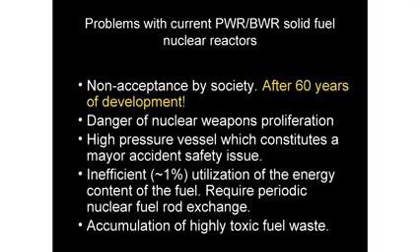So can you imagine worldwide 1,000 nuclear reactors producing each 230 kilograms of plutonium? It becomes a proliferation nightmare. It's a problem. And it worries people.

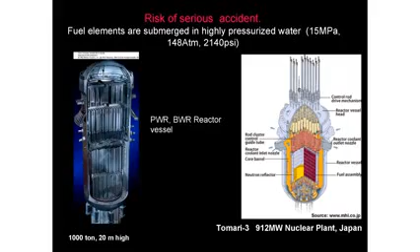Another problem is that present reactors have the nuclear fuel inside the reactor core, which is like a compressed container at very high pressure. And any problem with it is really a deep problem. We saw what happened in Fukushima. Fortunately, none of them actually exploded. None of them actually melted completely. Just a little melting, and it produced enough hydrogen to have the explosions we all saw. So this is a serious accident risk.

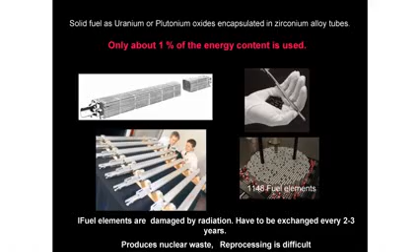Then with current technology, we only use about 1% of the energy contained in the fuel. The fuel is damaged by the use, by the radiation, and it is exchanged. And it produces nuclear waste. And these elements have to be constructed with extreme care, so it is expensive. And they turn into nuclear waste in 2 or 3 years. And this nuclear waste, if it is not reprocessed, is a problem which we all know: highly radioactive material with thousands of years of half-life.

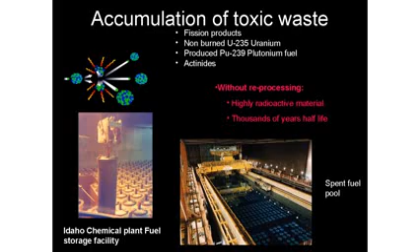So now we go to the thorium molten salt reactor, which I call the true green energy system. What do we want for the world? I think diversity, and nuclear can help to balance, as we just saw in the previous talk. A clean technology, free of CO2, a solution to nuclear waste. We want a safe technology so that we can see the future with optimism, not worry. We want to use our own resources.

At least we in the third world countries want to control our future and not be subject to policies like the US Global Nuclear Energy Partnership, which puts us as users with no control on our systems. And we want to use our own resources so that we develop ourselves, not rely on the development of other countries. And we want to use non-proliferative technology.

So, what is the molten salt reactor? I'm going to talk about that after I have a drink of water.

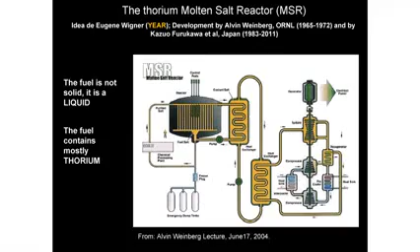It is an idea that occurred to Eugene Wigner and was developed by Alvin Weinberg. Alvin Weinberg, by the way, also developed the current technology we have. The fuel is not solid, it is a liquid. There are no fuel rods. In the thorium molten salt reactor the fuel contains mostly thorium, very little uranium. It circulates inside the reactor, and it goes out of the reactor to transport the heat to another cycle, which then transports the heat to the power-producing part. So, why use thorium?

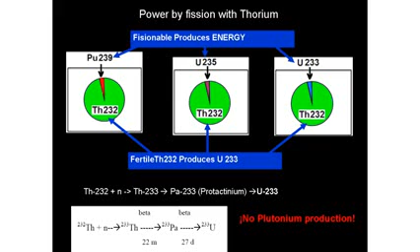Thorium can be used with either plutonium-239, uranium-235, or uranium-233, which is produced by the part of thorium which is inside of a reactor. So this thorium is now substituting for the uranium we had before. And it is fertile. It produces uranium-233, with which you can produce more energy, but it produces no plutonium. Very little plutonium is produced in these reactors.

Thorium is 4 times more abundant in the Earth's crust than uranium. So our resources are, shall we say, 4 times 300 years. Immediately we have, without changing very much the mathematics, 1,000 years of use. It produces much less nuclear waste, a fraction of long-lived actinides. So by fission, you produce nuclear waste, but you also produce actinides, which are long-lived. And in the case of thorium, you produce very little long-lived nuclear waste.

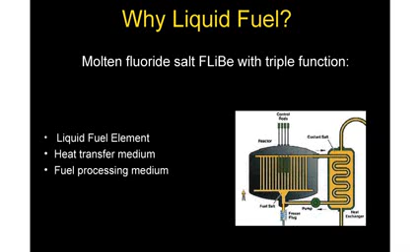Now, why liquid fueling? This is again a point. The molten fluoride has a triple function. It is the fuel element to consume and to produce the energy. It is the heat transfer medium, and it is also the fuel processing medium. So you don't have to change things. In the same cycle, you produce the fuel, you transport the heat, and you do the reprocessing of the fuel.

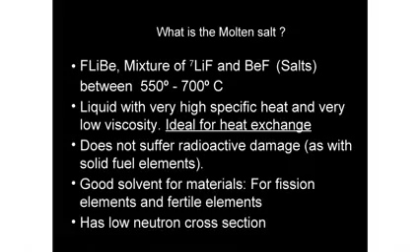And what is this molten salt? The molten salt is a mixture of fluorides, lithium fluoride and beryllium fluorides. These are salts which are like table salt. It is a solid at room temperature, which at high temperature becomes liquid, and it is clear like water. It is a liquid with very high specific heat and very low viscosity, which is ideal for heat exchange media.

It does not suffer any radioactive damage. It is a liquid, and with gamma radiation or alpha radiation or neutrons produced, it is not damaged at all. So it remains inside the reactor without being damaged, quite contrary to what happens to solid fuel elements. And it is a good solvent for fission elements and fertile material, and it has a nuclear property of very low neutron cross-section.

So what does it contain, this liquid? It contains the fuel, which can be uranium tetrafluoride, either uranium-235, as is used now, or what will be used in the future in these reactors, uranium-233, which is made in the reactor from the thorium. Or it can use plutonium. So the scheme is to burn all the plutonium in nuclear weapons now as fuel in these reactors, and to use the thorium inside to be converted to uranium-233, and therefore produce more fuel.

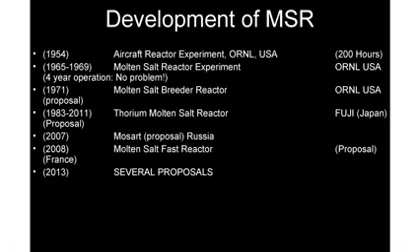So a short history, very quick, of the development of the molten salt reactors. The first idea was in 1954. The Americans had, due to the Cold War, the need to transport nuclear weapons from the US to Russia, very far away. So they asked the Oak Ridge National Laboratory if they could make a reactor that could fly. So it was made, the aircraft reactor experiment. This reactor was the first molten salt reactor, and it worked for 200 hours perfectly all right, and it was light enough to be put in an aircraft, and it gave them the idea to do a molten salt reactor for power production. And that was the 1965 to 69 molten salt reactor experiment, which had a 4-year operation.

And then after that, they created the proposal for the molten salt breeder reactor. And this molten salt breeder reactor was taken by the Japanese groups, who developed the Fuji reactor. And further proposals, as shown there, MOSART in Russia, the molten salt fast reactor proposal in France, and several current proposals, which I'll mention very briefly at the end.

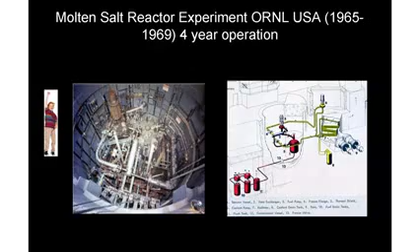So this is a photo of the molten salt reactor. It was a small thing. You can see this little boy here, which I put there. Standing in here, he would be more or less at the height of this, which was the pump. And this reactor did not produce electricity. All the power was just blown into the air.

You can see the diagram on the right side. The reactor was in the middle, and the reactor was stopped every weekend. They drained the liquid to those tanks in the bottom, and on Monday they put it back up and continued the experiment. Very, very different from current reactors, which can't be stopped.

So there are several kinds of proposals for molten salt reactors. The first classification is two-fluid reactors or single-fluid reactors.

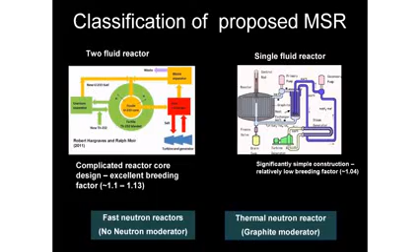The two-fluid reactors have a core where the center, here, the reaction takes place, the fission takes place, and the neutrons go out into a blanket which is around, which is there to produce more fuel. So it is a complicated reactor, the core design, but it has very excellent breeding capacity.

So it can produce more fuel than it is burning. On the other hand, the single fluid reactor is much simpler, and it has a low breeding factor. That means it burns more or less the same or more than what it's producing. And then there is another classification, the fast reactors and the thermal reactors. We will talk more about that.

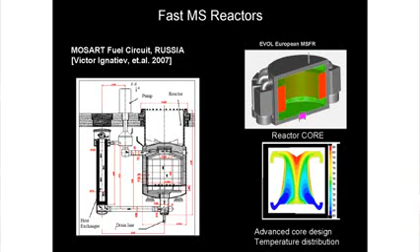These are two of the proposals for fast reactors. The MOSART, as described by Victor Ignatiev in 2007, designed in Russia at the Kurchatov Institute. And on the right side, the EVOL European molten salt fast reactor. It is a proposal that is being studied currently, and very recently, at the end of last year, a meeting of the EVOL showed this advanced core design, the temperature distribution, which is much better than this from the flow point of view.

Some of the advantages of fast reactors is that the core is extremely simple. It's just an empty tank. There's nothing that can go wrong there. It is extremely stable. And why is it so stable?

Well, because the fluid, if it becomes hotter, it expands. And when it expands, it reduces the reactivity. So therefore, by reducing the reactivity, it starts to cool. So it is naturally stable.

Some experiments, mathematical of course, that have been run, show that the reactor starts to heat up and then cools, oscillates, and it comes to a steady state. And this is what would happen if you suddenly stop all the devices inside the reactor, like, say, the case in Fukushima, no electricity. It is very stable. It is a breeder reactor that produces more fuel in operation.

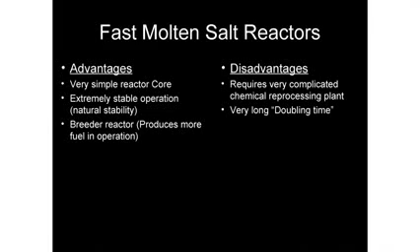But the disadvantage is that it has a very long doubling time. The doubling time is the amount of time that it needs a reactor to produce as much fuel as it has consumed. And for the EVOL project, as described in 2008, the doubling time is about 40 years, which is very much longer than the doubling time of the demand for energy. So something else has to be done in order to produce more fuel.

Now I'm going to talk about the thermal reactor, and mostly with the design of Kazuo Furukawa. He created the concept of the mini Fuji, then the concept of the Fuji reactor, and the concept of the accelerator molten salt breeder.

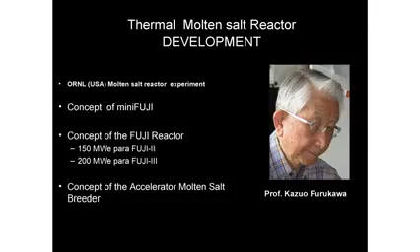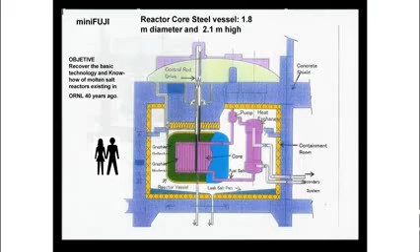First, the mini Fuji reactor. What is it? It's a very small reactor. The core would be about here, this size. Very small. And why? The objective is to recover the basic technology, the know-how that was obtained at Oak Ridge 40 years ago.

One thing is having the information there. Libraries are full of information, but knowledge really requires that you do things with this knowledge. And this is what is needed to make this little reactor, so that we actually know what we're doing and find out, again, all the difficulties.

In this reactor, the contents of the reactor core is mostly pure graphite with holes through it. 6% of the volume is the liquid that is flowing through. And there is control by graphite rods, which work the other way around. You increase the reactivity by introducing more graphite inside the core.

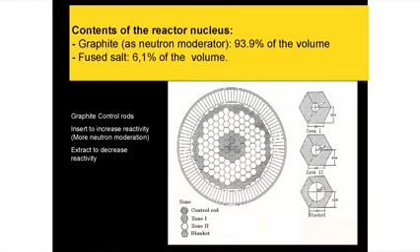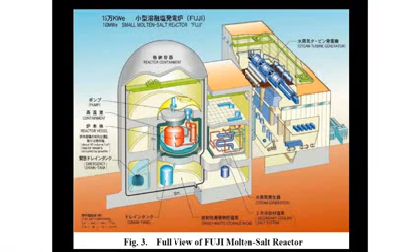On the right side are the parts of the reactor which transport energy and heat, and this produces electricity. And this is a description of the Fuji reactor core.

It is a small reactor, only 160 megawatt electric. And the idea is that it is so safe, it can be built right next to cities and have very little expenditure in transport of energy, electricity.

This shows the first containment area and the second containment area. Now, here, if anything would happen, you would drain into one of the containers below. And that is the heat transfer unit.

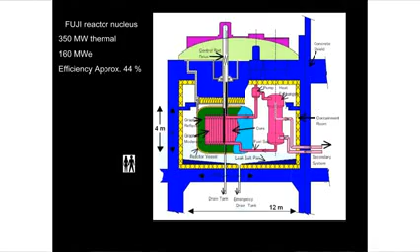So what are the advantages of the molten salt reactor? It is practically impossible to have a severe accident because it is very low pressure, only about twice the pressure of a car tire inside a steel container. And the molten salt is chemically inert. It does not react with water or air or anything.

And the boiling point is about twice the temperature of the operating temperature. So it is very safe. Any excursion going to higher temperature, it is safely below the boiling point.

And there are many other advantages. I couldn't go spend the time, but I shall point out 2 of them. This is the diagram of the heat exchange in the reactor.

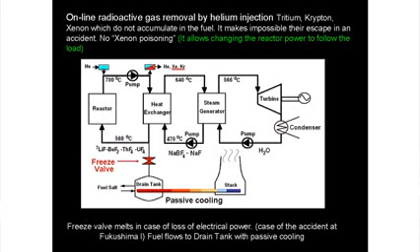One of the points is that there is a radioactive gas removal. You inject helium and it removes the radioactive gases that are produced by fission. This was found at the experiment by Oak Ridge to remove some other radioactive materials as well. So if there is any problem, there wouldn't be any gases getting out of the reactor because they're not there.

And this has another advantage, that there is no xenon poisoning. This is a phenomenon which was instrumental in what happened at Chernobyl. Xenon poisoning is something that in a normal reactor you have to have excess reactivity in order to overcome the poisoning by xenon. In this reactor you are removing the xenon, so you don't have to have excess reactivity.

By not having xenon poisoning, the reactor can go up and down in power, which is something that is not done with normal reactors. They are better operating always at the same power.

And then there is another point, which is this freeze valve. The freeze valve is a valve which is below the reactor, and it is actively cooled by blowing air into an area where the salt is frozen.

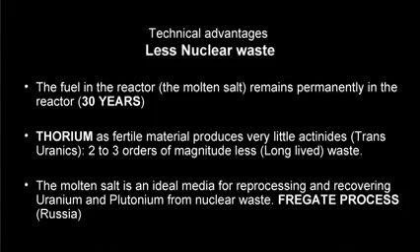So there is safety. The fuel is only critical in the graphite, and the fuel becomes a solid, trapping the radioactive material. There is less nuclear waste. The fuel in the reactor can stay permanently for 30 years. And thorium is a fertile material that produces very little actinides. The molten salt is an ideal medium for reprocessing and recovering.

This is a proposal by Furukawa, which is to reprocess the fuel from current reactors by turning these fuels into fluorides, dissolving these fluorides into the molten salt and pushing them into this device.

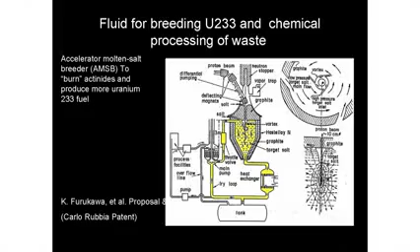And this device, what is it? At the top, there is an accelerator, which is not there—a very high energy accelerator that throws some protons into the fuel inside there.

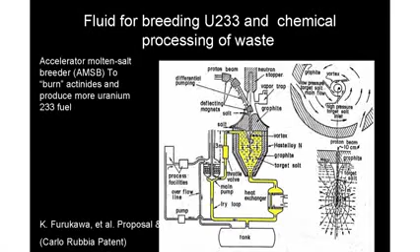And it uses a nuclear process called spallation. Spallation is when a particle falls against a heavy ion, a heavy element, and it produces a lot of neutrons, 40 neutrons per reaction. It is a very neutron-rich reaction. The reactor itself is not a neutron-rich device, it is an energy-rich device.

So in this concept, you don't need a fast reactor to produce more fuel. The fuel would be produced in a device like this, where a neutron-rich reaction can produce a lot of fuel by irradiating thorium and producing uranium-233, and also by burning the actinides from the reactors that are currently operating.

So, non-proliferation and terrorism: no production of plutonium, burning of weapons-grade uranium, and the production of uranium-233. Now, uranium-233 was used for one atomic bomb in 1955. And after that, it was never used again, because it is very bad, very difficult to produce a bomb with it. And the reason is that it is very radioactive.

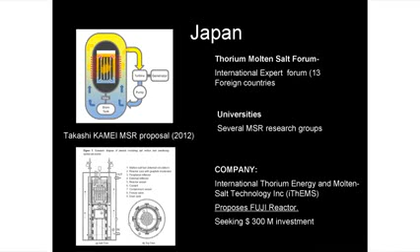So some of the developments, a few comments very quickly. In Europe, there are quite a few countries working, groups there. There are several organizations, as shown there, and all of those institutions are participating in this EVOL development. In Japan, there are several. This is a new proposal by Takashi Kamei. And there is the Molten Salt Forum, which includes 13 countries, and there are several universities, and there's the Fuji reactor, which was designed there.

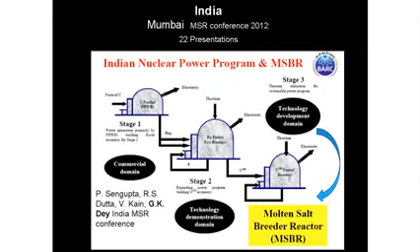In India, this is another emerging country coming into the molten salt camp. They have, for a long time, a 3-stage project to use, in the 3rd stage, thorium. It was created by Bhabha, the creator of the Bhabha Nuclear Center. Now they are coming into the thinking that the 3rd stage will be perhaps a molten salt breeder reactor.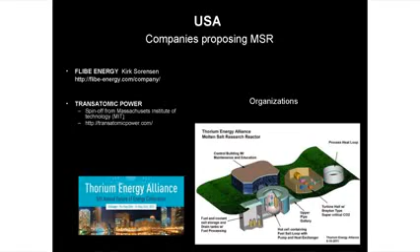And countries like the US have 2 companies, one by Flibe Energy. Kirk Sorensen is the man pushing it behind. Transatomic Power, which is a spin-off from MIT, where some students work. And there is a Thorium Energy Alliance organization, which is very active in the US.

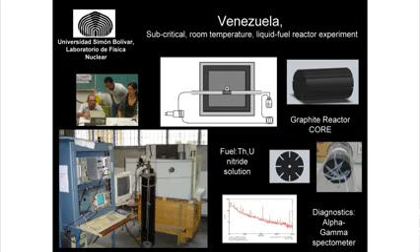And in Venezuela, we have a small facility where we are actually doing experiments, not with molten salt, not at high temperature. It is a room temperature experiment with liquid fuel, and there are some photos there. And these spectra were obtained about a week ago from the device that is operating there.

And the most advanced project is in China. China is definitely moving towards the molten salt reactor, in addition to other projects, including a pebble bed reactor and fast reactors. They announced plans for 300 million in 2011. And now, very recently, at the Shanghai conference, the Institute for Applied Physics is working with the support of the Chinese Academy of Sciences, and there is a budget this year of 100 million. It is definite that they will go forward with this.

In conclusion, nuclear power is the only technology capable of supplying the world's huge demand for energy. Present-day solid fuel reactor technology has problems which have made it non-acceptable by society, although they are producing very good service. There's a worldwide movement in support of the thorium molten salt reactor. The development of different forms of molten salt reactors is recommended, as competition will lead to the best technology. And finally, the thorium molten salt reactor is a new technology capable of providing the clean, safe, and cheap energy which is necessary for future development of society. Thank you very much.